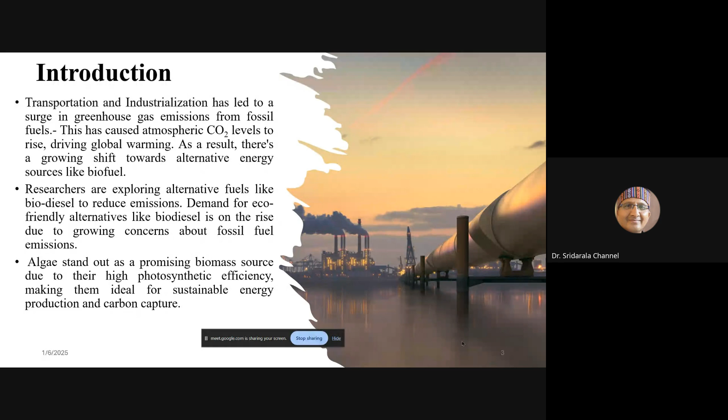When we say biofuels, in the broad category we all know about biodiesel, right? Many of us have long been familiar with the term biodiesel. Can anyone answer what biodiesel is? Sir, biodiesel is manufactured by transesterification of triglycerides with 3 moles of methyl alcohol. Exactly, exactly. Very good.

So what is the raw material used for biodiesel production? Sir, we can simply say its origin is triglycerides, vegetable oil or animal fat. Animal fats. Very good. Exactly.

Over the last 2 decades, research has focused on alternative fuels like biodiesel, which are derivatives of vegetable oils, exclusively non-edible seed vegetable oils, and the demand for alternative fuels like biodiesel is on the rise due to growing concerns about fossil fuel emissions.

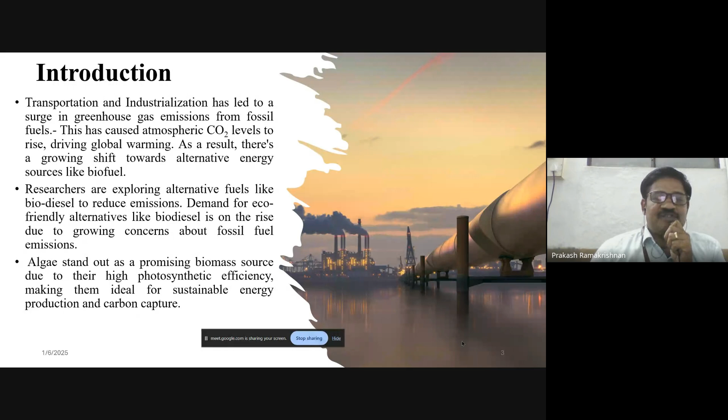And here, for the HTL process, we introduce one more biomass as a feedstock, which we call algae biomass. It comes under the third generation biomass category and is a promising biomass source due to its high photosynthetic efficiency, making it ideal for sustainable energy production and carbon capture.

So the first stage is to select an appropriate biomass suitable for this HTL process, and then it needs to be characterized, with ultimate analysis, proximate analysis, and other chemical characterization, to identify its suitability for the hydrothermal liquefaction process.

Then we move on to the HTL process and the process variables to be discussed. Then the oil yield, which we call biocrude, is obtained from this HTL process. The biocrude oil needs to be characterized to know its physicochemical properties, and then we move on to engine applications.

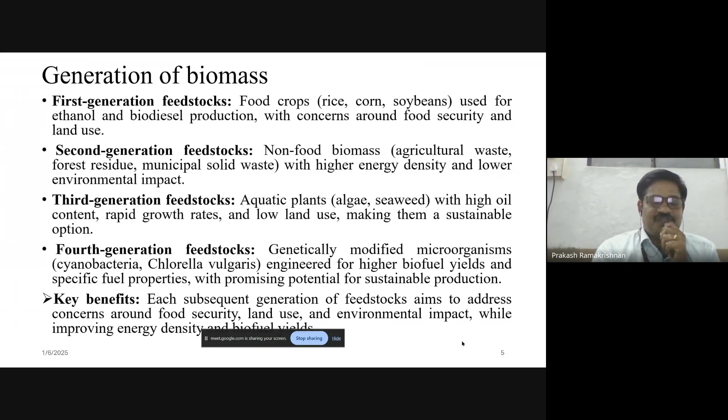And to start with the biomass characterization, first we should know what is the elemental composition of biomass. Each biomass contains carbon, hydrogen, oxygen, nitrogen, and sulfur, with the maximum amount of composition from carbon. Approximately 50% of carbon may be there in any biomass on a dry weight basis. Higher carbon content levels in the biomass mean that it has a higher heating value, and it has a very good thermal energy potential, making it suitable for renewable energy applications.

And hydrogen content is essential for biomass for its growth. It's a major content, and sugarcane, corn, switchgrass, or algae are hydrogen-rich biomass resources. That's going to enhance the hydrothermal liquefaction process reaction rates and the heating value of the biocrude oil obtained from this HTL process. And the oxygen content: oxygen helps in cleaner combustion, but it affects the heating value of the biocrude. If excessive oxygen is there, the calorific value of the fuel will reduce.

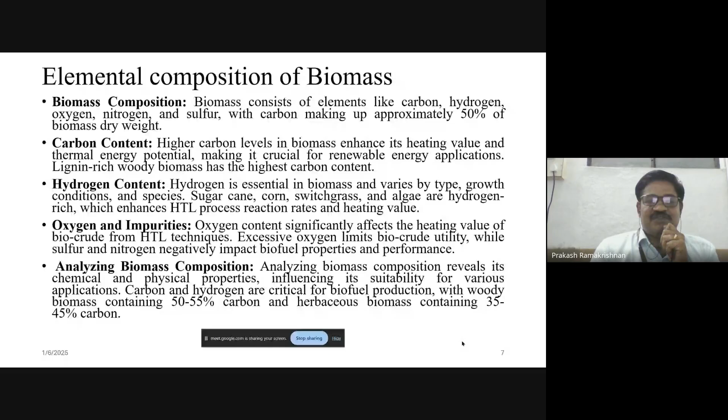Carbon and hydrogen are most essential for biofuel production, where woody biomass contains around 50% carbon, and herbaceous plant biomass contains 35 to 45% carbon content. Moving on to the proximate analysis of biomass. The first step is the elemental analysis, where we analyze the carbon, nitrogen, sulfur, oxygen, and the next step is the proximate analysis to find out the moisture content present in the biomass, ash content, volatile matter, and how much fixed carbon is present. This is again an important step in biomass characterization.

So the ash content should be as low as possible. We should select the biomass where the ash content left from the process is as low as possible. Then the moisture content affects the bio-oil conversion efficiency and its quality, so what researchers generally do is dry the biomass completely before processing. Drying the biomass before processing will enhance the efficiency.

But for this particular HTL process, there is no constraint on moisture, because the HTL process can accommodate wet biomass also. Normally, other thermochemical conversion processes like pyrolysis or gasification require dry biomass, with no moisture content, to get the maximum yield. Pyrolysis is a thermochemical conversion process where you keep the substance in a reactor and supply heat externally, and in the absence of air or oxygen, the biomass inside the reactor undergoes thermal decomposition, yielding a gaseous product. By condensing it, you can get a bio-oil yield.

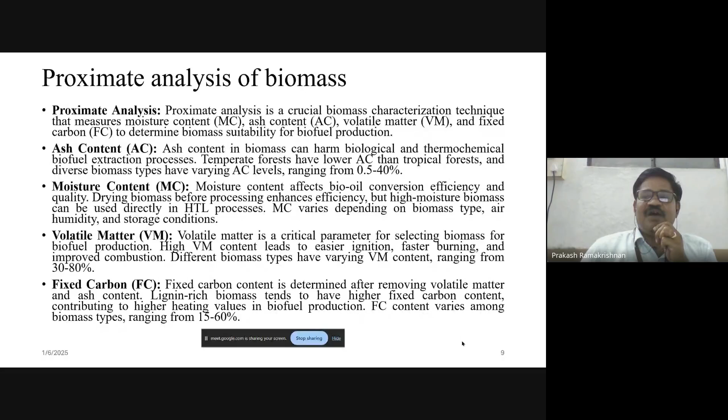The fixed carbon content for biomass may vary from 15 to 60 percentage. Another important parameter for any biomass is that it should have a higher calorific value. So the calorific value, we classify into higher calorific value and lower calorific value. But generally, whatever we directly get from burning biomass is the higher heating value, which represents the total thermal energy released during a complete combustion process.

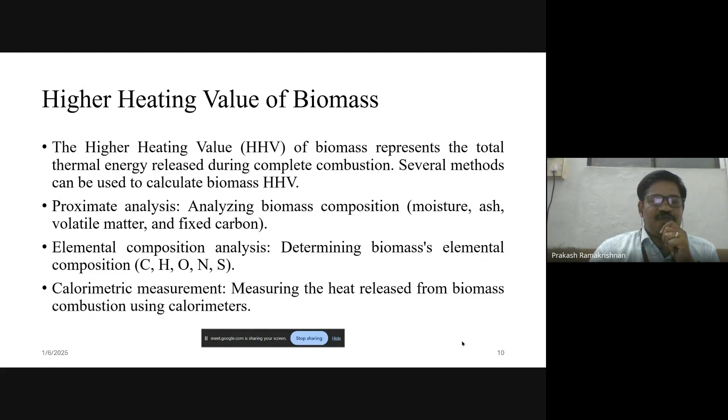There are different methods to calculate this higher heating value: by proximate analysis, analyzing biomass composition from moisture content, volatile matter, and fixed carbon, and even from elemental composition using CHNS analysis. Conventionally, we also use bomb calorimetric measurement, where we directly measure the heat release from biomass combustion using calorimeters. These are the options to measure the higher calorific value of a biomass material.

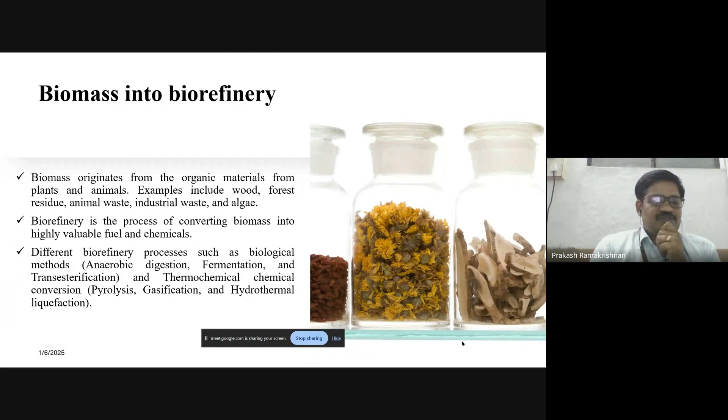Moving on to biomass biorefinery concepts, we don't aim only at liquid fuel. You can aim at producing or converting some value-added products out of biomass conversion. We may have heard about anaerobic digestion, fermentation, and transesterification process - these are all biological conversion methods. In thermochemical conversion methods, we can elaborate with pyrolysis, gasification, and hydrothermal liquefaction process.

So moving on to thermochemical conversion of biomass. The first category is pyrolysis, where the reaction temperature is limited between 300 to 800 degrees Celsius, carried out at atmospheric pressure level. The biomass is kept in a pyrolysis reactor and heated at 300 to 800 degrees based on thermogravimetric analysis. It then leaves the pyrolysis vapor. By condensing the pyrolysis vapor, you can collect pyrolytic oil, which we call bio oil, and also get biochar out of this pyrolysis process.

The second method is gasification. You may have heard about fluidized bed gasification, fixed bed gasification, and other methods. This is generally held at atmospheric pressure conditions, but the temperature is slightly higher than pyrolysis, between 700 to 1200 degrees Celsius. This yields a gaseous product, not a liquid product. Generally, gasification is meant for producing syngas, which is a hydrogen rich gas obtained from biomass resources.

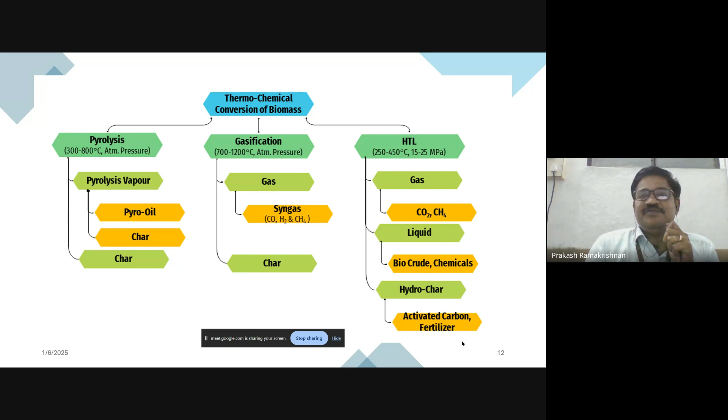The topic of our interest is the hydrothermal liquefaction process, where the reaction temperature is maintained at lower levels compared to pyrolysis and gasification. The HTL process can be done at a temperature of less than 450 degrees Celsius, but not at atmospheric pressure conditions - here we need to apply pressure also. So HTL process has input variables like pressure as well as temperature. Pressure should be between 15 to 25 megapascal, that is 150 to 250 bar pressure applied to the reactor.

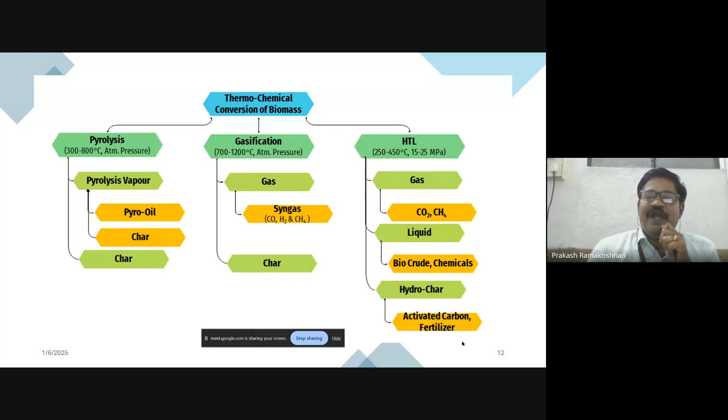This process can yield a gaseous product, which is methane rich with carbon dioxide in remaining composition. If you get a liquid product out of that, you collect it as biocrude and other value added products. This also leaves a char, which we call hydrochar, which can be used for producing activated carbons and can be used as fertilizer. This is the introduction to the HTL process.

Hydrothermal liquefaction process is a thermochemical conversion process that converts wet biomass into a biocrude, which can be upgraded to produce renewable fuels, chemicals, and other valuable products. In this HTL process, the wet biomass is fed into a reactor, which is subject to high temperatures between 200 to 350 degrees Celsius and pressures up to 250 bar.

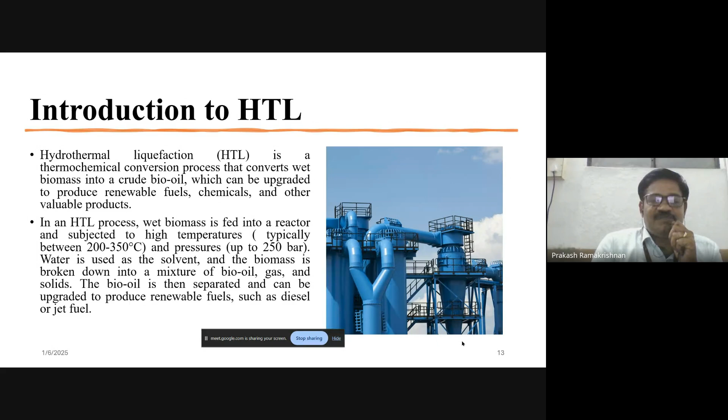As there is no limitation on moisture content, you can add water as a solvent to the biomass and prepare a biomass slurry by making a mixture of biomass and water, and this slurry has to be fed inside the reactor. I'll show the reaction conditions. In this method, the complex biomass molecules are broken into simpler compounds such as hydrocarbons, oxygenated compounds, and water.

There are a variety of feedstocks that can be used in the HTL process. We can focus exclusively on algae, municipal solid waste, and lignocellulosic biomass. It has a significant advantage in that there is no need for the feedstock drying process, which reduces the energy input spent for the entire process.

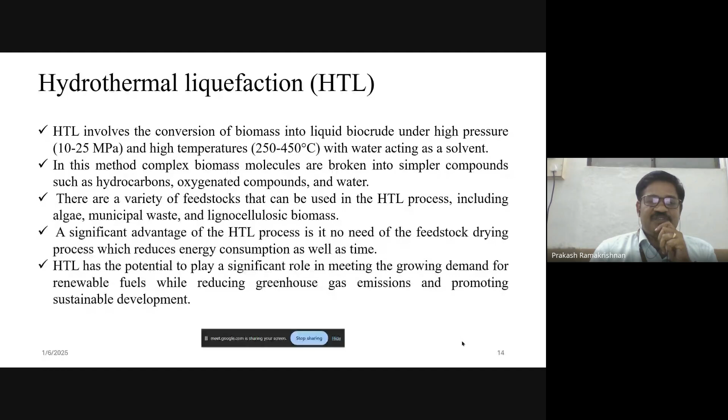So it has a potential to play a significant role in meeting the growing demand for renewable fuels, and also it's going to reduce greenhouse gas emissions, which is going to promote sustainable development.

So this is the reaction mechanism of this HTL process. There are three major reactions that are going to take place during this HTL process.

The first one is depolymerization, where the hydrolysis of biomass with water is going to happen, or you can replace the water with other solvents like ethanol, methanol, acetone. The first step in the HTL process mechanism is depolymerization, where you break down the molecules of biomass by mixing a solvent, either water or ethanol, methanol, acetone, or any other solvent.

The second step is degradation, where these hydrolyzed monomers undergo dehydration, where the water content has to be removed, and you can also remove ammonia-type compounds through deamination and decarboxylation, removing the excess carbon content.

Finally, the recombination process will happen, where these reactive monomers combine together to produce a biocrude. So first stage is hydrolysis of biomass with solvent, then degradation of the biomass materials, then recombination, where the reactive monomers combine and produce the biocrude as a yield.

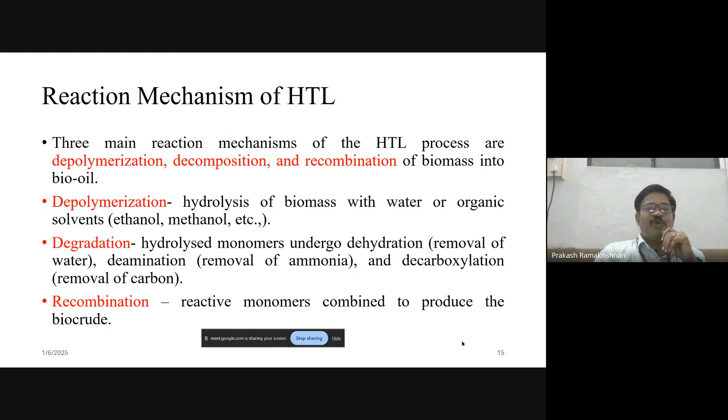This is the schematic diagram of the entire HTL process. Starting from the biomass, biomass and solvent are added together in the form of a slurry, which is fed into the HTL reactor. Directly supplying temperature and pressure may yield gaseous products containing carbon dioxide and methane.

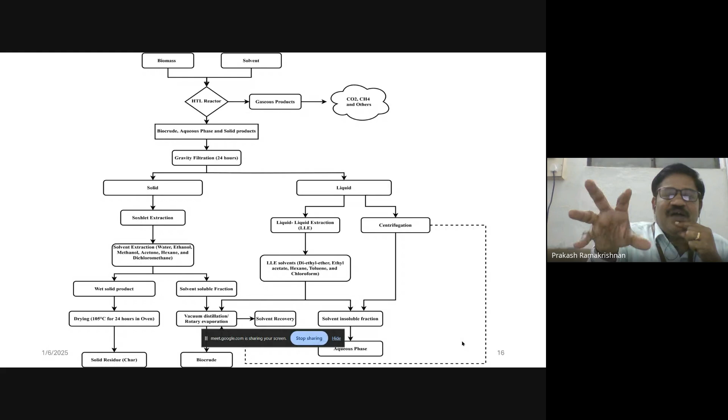Or if you aim at producing liquid fuels, you go with the biocrude, which contains an aqueous phase and other solid products. There's an important challenge in the HTL process: whatever yield you get is called biocrude, and this will be a mixture of aqueous phase and solid phase.

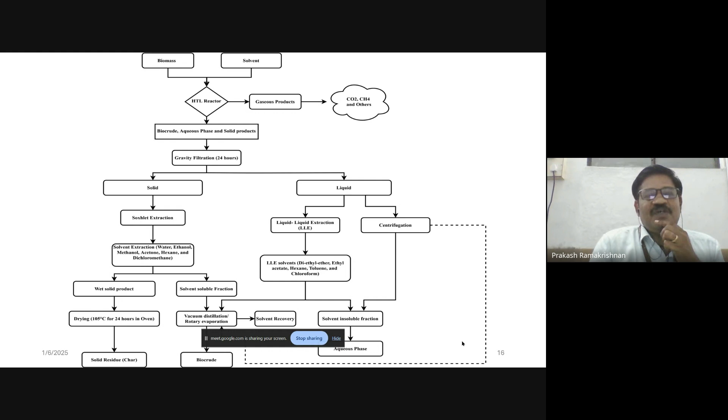So you need to undergo a separation process. Generally we go with gravity filtration, where we keep the aqueous phase in a conical flask and leave it for 24 hours, and the solid particles accumulate at the bottom due to the density factor and can be removed.

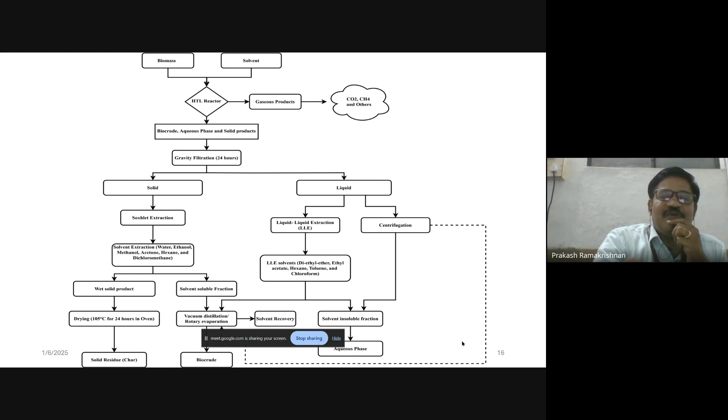If you want, you can further treat the solid particles collected at the bottom of the conical flask with a Soxhlet extraction process by adding some solvent, and you can separate the wet solid product and soluble fractions from that.

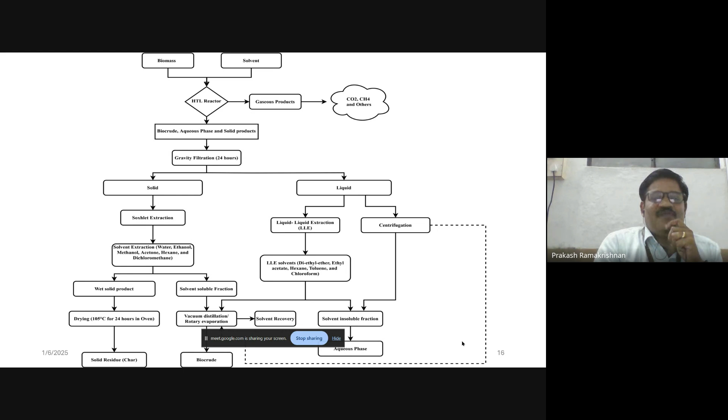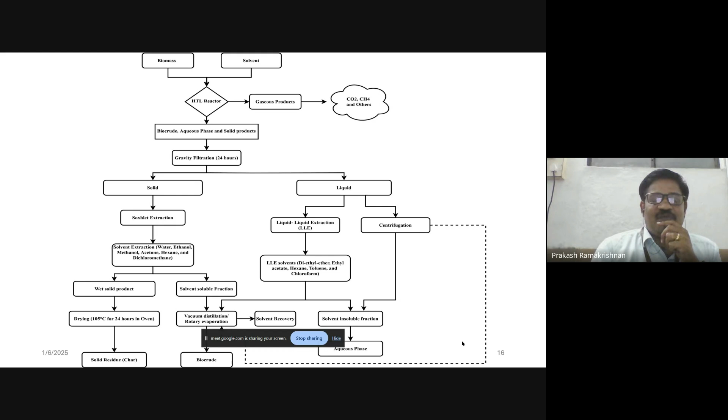From there you can also produce biocrude, and the other part, the solid residue left over at the end, can be considered as char, which can be used as a fertilizer, or it can be further treated to produce activated carbons.

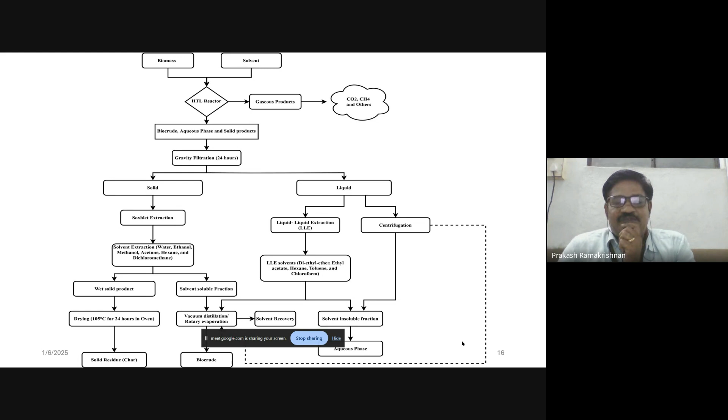Then from the liquid part, the aqueous phase collected has to be subjected to liquid extraction. You need to add a solvent like diethyl ether, ethyl acetate, hexane, or toluene, and process it through vacuum distillation or rotary evaporation. From that you can remove the solvent separately and collect the biocrude.

There is another method called centrifugation, which also separates the solid particles as well as the biocrude fractions.

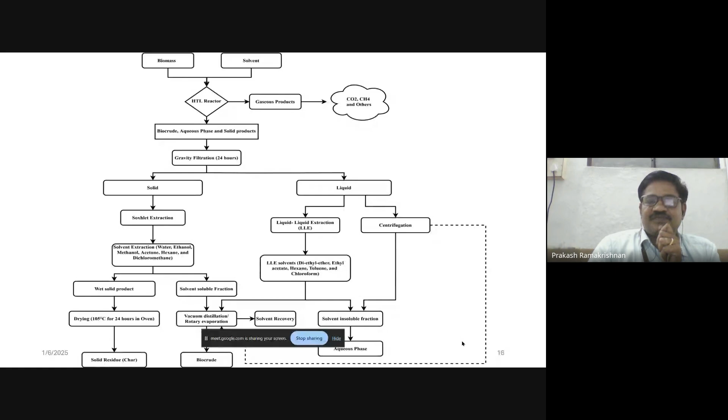This is the process flow diagram of what generally the HTL process undergoes. This is how the reactor looks like. It's a sample one; I will show the actual reactors in my following slides.

The HTL reactor is like a pyrolysis reactor. It's again a stainless steel one with a lid at the top to seal the environment, and it is heated by electrical means from the external side. There is an option to measure the pressure and temperature.

You should connect thermocouples to measure the temperature and pressure. There is a stirring mechanism in the reactor, a motor at the top, to give stirring action to enhance the HTL process. This deals with the solvent tank.

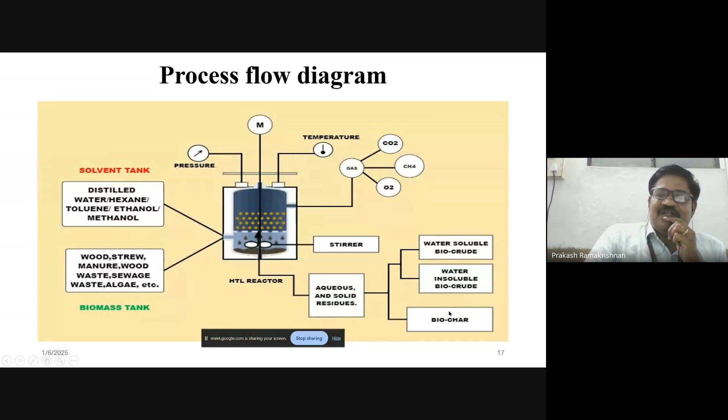This is where you need to supply the biomass and solvent together. We make a slurry, and it has to be filled inside the reactor. This HTL reaction yields aqueous and solid residues, from which you can separate solid particles like biochar, water-soluble biocrude, and water-insoluble biocrude.

And the HTL processing methods. You can have different methods of HTL process. Direct HTL is a simple process. Directly you can take any wet biomass, you don't need to dry it, so it will reduce the cost, the capital cost of the HTL process. But it requires post processing. If you go with direct HTL process, whatever yield you get after the reaction may undergo several steps of separation process for upgradation.

And if you go with the catalytic HTL process, where you use catalysts to improve the reaction rates, that is going to increase the biocrude yield and reduce the oxygen content present in the biocrude substance. And there is another method called co-solvent HTL to enhance the conversion efficiency and reduce char formation.

That we can go with co-solvent HTL process. And the other method is hydrogen-assisted HTL. Normally for pyrolysis or HTL process, to start the reaction, initially we purge nitrogen as an inert gas, which goes inside the reactor and replaces the entire air out of the reactor. You have to ensure there is perfect vacuum or inert environment inside. By passing this inert gas, we replace the air outside. Instead of purging nitrogen, you can also purge hydrogen, to produce high quality biocrude with lower oxygen content, but you need to supply external hydrogen for that.

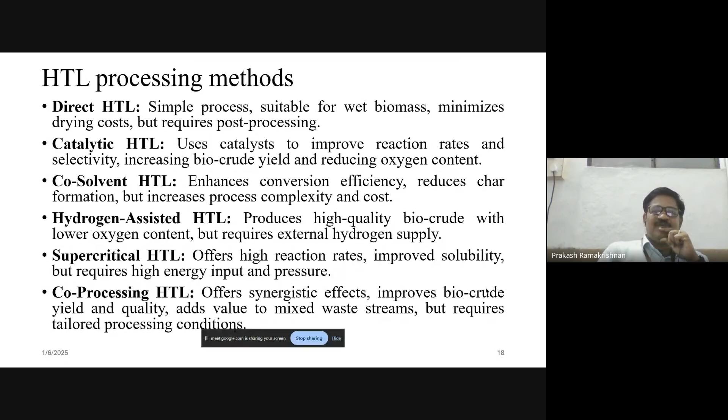And there are some supercritical HTL reactors where the reaction rates are very high and give very soluble biocrude fractions, but it requires higher energy input and pressure conditions. And in recent days, there is a co-HTL process that is booming, where biomass materials are mixed with waste plastics or other recyclable or non-degradable materials together to improve the biocrude yield and the quality of the value-added products.

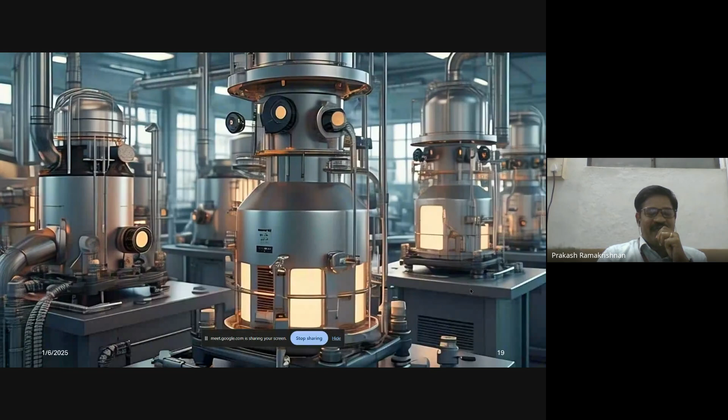So this, anybody have seen this type of structure? How you name this one? How does it look like? Boiler. It looks like a boiler. Any other? Anybody seen these autoclave reactors? Autoclaves. Autoclaves are also a kind of HTL reactors only.

Like you can use autoclaves for HTL process. So moving to HTL reactor types: you will find a batch reactor, which is simple in design and suitable for small scale or laboratory studies, but it has a limitation for scalability.

And again, there are some advanced continuous flow reactors for industrial scale production for large quantity of biocrude production. Generally, industries go with these continuous flow reactors. And there is a plug flow reactor also, which has high conversion efficiency, uniform flow, and is easy to scale. But there is a problem with the plug flow reactor where it may undergo fouling effect.

And again, the advanced versions will have the stirred tank reactor where there will be a stirring mechanism to maintain uniform temperature and pressure distribution inside the reactor, suitable for viscous or heterogeneous feedstock, but it is energy intensive, meaning you need to supply electrical energy to drive the motor for the stirring action inside the reactor.

And the fluidized bed reactors, similar to the gasification fluidized bed or circulating fluidized bed we heard about. This will ensure excellent mixing of biomass substance and enhance heat transfer, suitable for solid or semi-solid feedstocks, but the design is complex and requires heavy maintenance expenditure. And the coil tube reactors are compact and efficient, and reduce residence time variations, but there is a problem of clogging in coil tube reactors when rich solid feedstocks are used. It will encounter clogging problems.

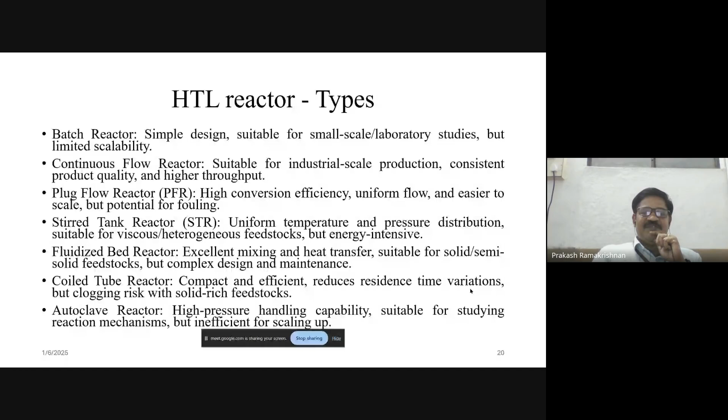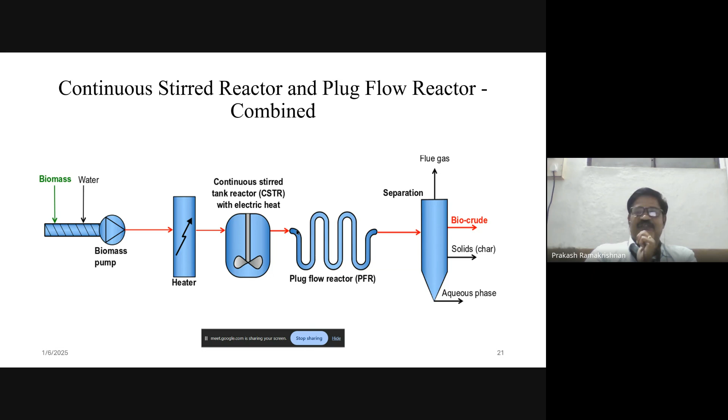So this combined continuous stirred and plug flow reactor has the advantages of both the continuous stirred mechanism as well as the plug flow reactor mechanism. So that is going to yield a large quantity of biocrude, and the separation process is going to happen in all the cases. I'm going to the separation processes, the HTL process separation methods.

The first step is phase separation. So first step, separate the biocrude, aqueous phase, and solids based on the density. That's the gravity separation I told. So it is going to separate the biocrude, aqueous phase, and solids based on its density and its solubility difference. Second step, it's filtration to remove the biochar from the liquid effluent using filters or membranes.

And the third step that you can go with is centrifugation, that's going to be efficient for separating solid and liquid phases using centrifugal force. Or otherwise, we can go with solvent extraction, where biocrude can be refined by adding some solvent, and that is going to remove the impurities, and also you can get some other value added compounds from that solvent extraction method. Distillation process, vacuum distillation process, is commonly used.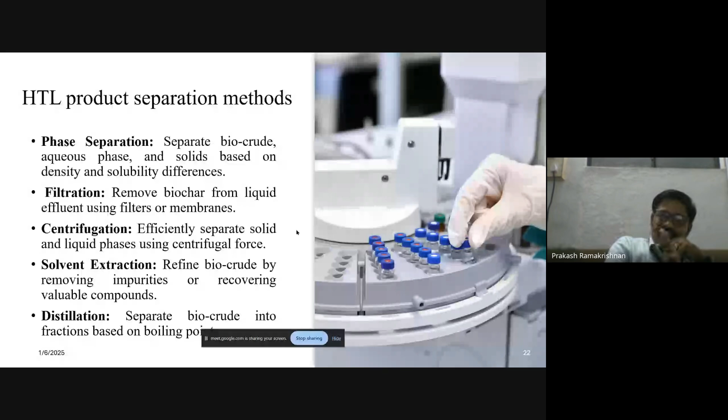You can separate the lower molecular fractions and heavy molecular fractions using the fractional distillation process. Here, what we call it as heavy oil fractions. And apart from this, byproducts are there from the HTL process. So it is going to leave biochar, aqueous phase, and also biogas, which have some value applications, and can be refined into higher value added products.

So biocrude is generally viscous in nature. It's again an energy dense oil. It can be used as a transportation fuel or heating fuel in furnaces, or it can be used as a chemical feedstock, and it's going to be a carbon neutral fuel.

And biochar, it's again a carbon rich solid residue, which can be used for soil amendment, can be used as adsorbent material, say activated carbons, which are promising materials used for the carbon dioxide capturing process. For CO2 capturing, these activated carbons are used as adsorbent materials, or it can be used as a solid fuel source.

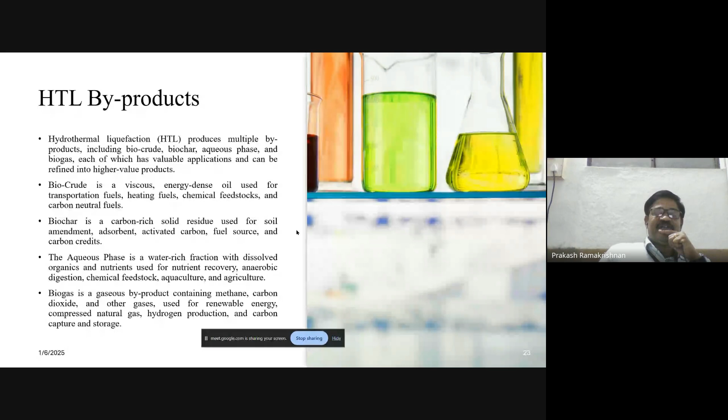The aqueous phase, which is a water rich fraction dissolved with organics and nutrients, can be used for nutrient recovery, and it can be further treated in an anaerobic digestion process to produce biogas, or it can be used to produce chemical feedstocks, for aquaculture and agriculture.

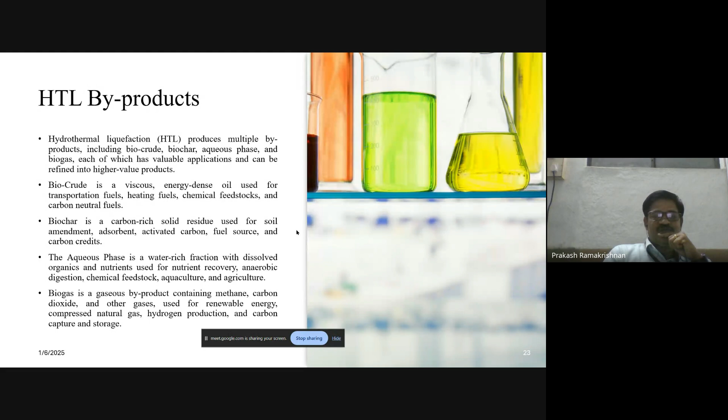And the final part, the biogas, is a gaseous byproduct which contains a large amount of methane and carbon dioxide and other gases, which can be used as a renewable energy source like compressed natural gas, or as an energy resource for separating hydrogen from biomass resources, and it can be used for carbon capture and storage purposes. And the biocrude upgradation techniques: it can be upgraded by hydroprocessing.

Hydroprocessing is generally the process of removing oxygen, sulfur, and nitrogen from the biocrude using hydrogenation or hydro-deoxygenation. So hydrogenation is enriching the biocrude with hydrogen, which will replace the oxygen content in the biocrude. And hydro-deoxygenation is again removal of oxygen from the biocrude product. And you can further upgrade the biocrude through catalytic cracking by breaking down the heavy biocrude molecules into lighter hydrocarbons using some catalyst.

Also, you can subject this biocrude to the transesterification or esterification process. It's going to convert the free fatty acids in the biocrude into esters. So the free fatty acids present in the biocrude are converted into esters. That will reduce the acidity and improve the fuel properties.

In the earlier stage we discussed the distillation process; again, you can separate the biocrude into lower molecular fractions and heavier molecular fractions based on the boiling points, and they can be used for further processing. Electrochemical upgrading employs electrochemical cells to remove the oxygen and nitrogen from biocrude through reduction mechanisms, and solvent deoxygenation uses solvents to remove the oxygenated carbons from the biocrude.

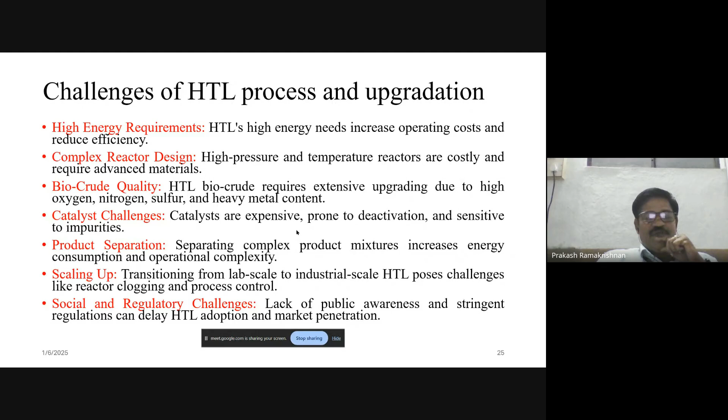Then product separation: separating complex product mixes increases energy consumption and operational complexity, and scaling up is again a challenge. Translating the HTL process from lab scale to industrial scale brings process challenges like reactor clogging and process control. Apart from that, there are some social and regulatory challenges. There is a lack of public awareness, and there are stringent regulations that can delay HTL adoption and market penetration. So far, it is still not commercial; people are doing it only at the research level.

And the future prospects: it can proceed with microwave irradiation. That will increase the biocrude yield from lipid, produce comparable yields from protein and lignin, and decrease the yield from carbohydrate. And there are a lot of opportunities to adopt machine learning techniques to predict the product yield and the quality of the biocrude, rather than using conventional mathematical models.

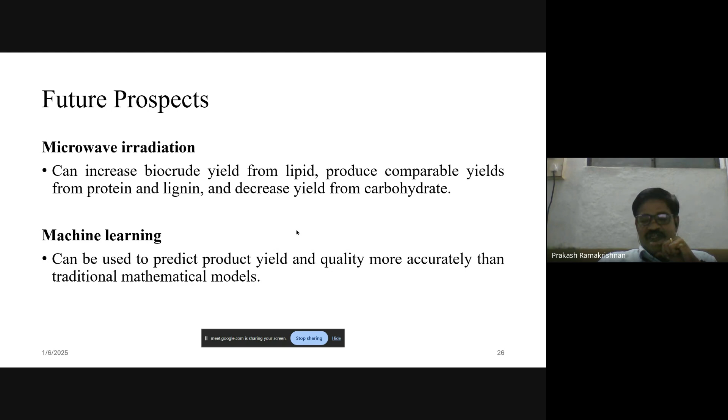Right. So this is about the general one. Now to my experimental facility, which we designed as an outcome of a sponsored research project funded by the Department of Science and Technology. This is a currently ongoing project where we have designed a reactor with SS316 material, withstanding a maximum operating pressure of 250 bar and a temperature of 450 degree. It's a kind of autoclave reactor. It's a fixed bed reactor, not a continuous one.

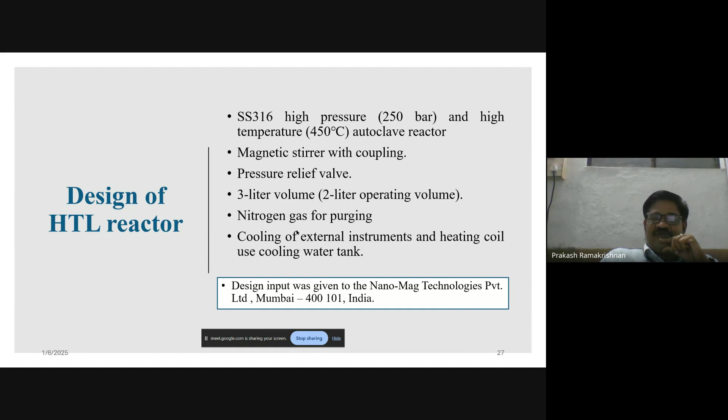It has a magnetic stirrer with coupling, and there is a pressure relief valve to avoid any unwanted incidents during the reaction process. It's 3 liter volume, but you can go ahead with 2 liter volume, not the full volume, for the HTL process. There is an option for nitrogen purging, and we provided external cooling coil arrangements to reduce the temperature of the reactor once the reaction is over. This was designed by a supplier from Mumbai, Nano-Mag Technologies, and this is the design input that we provided to the vendor.

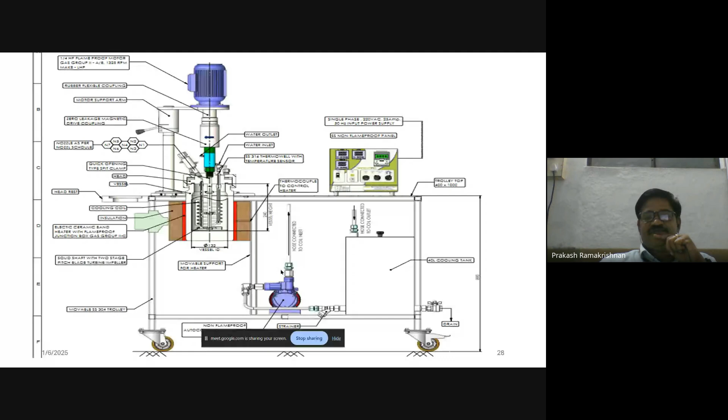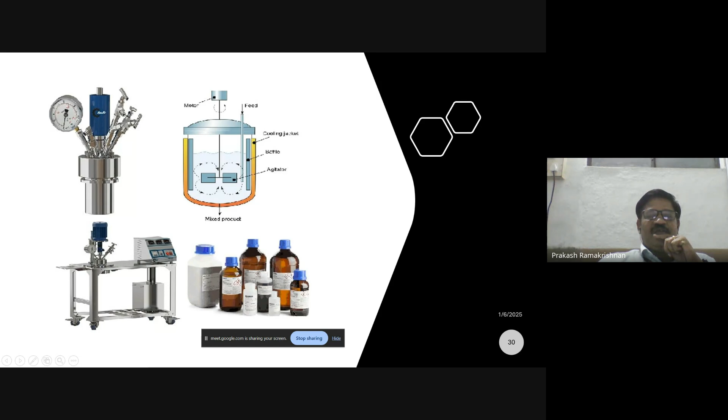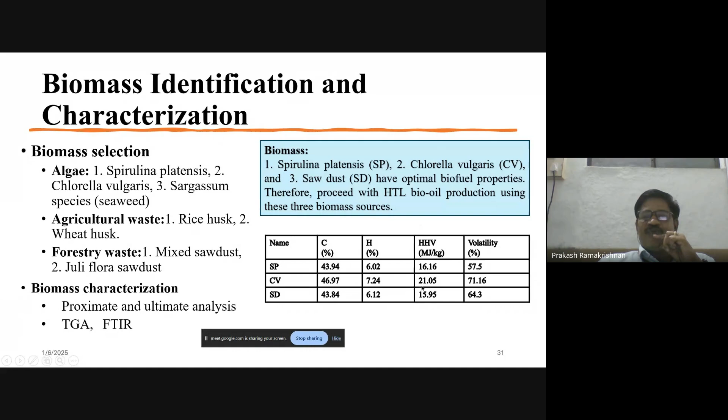For the HTL process, we selected 3 different algae biomass materials: spirulina, chlorella vulgaris, and sargassum, what we call seaweed. We also tried rice husk, wheat husk, and forest waste like sawdust obtained from juliflora wood. We did complete characterization, proximate analysis, ultimate analysis, and FTIR analysis, to find the elemental composition of each biomass, like carbon and nitrogen, the heating value, and the volatile substances present. These are the results from the ultimate analysis.

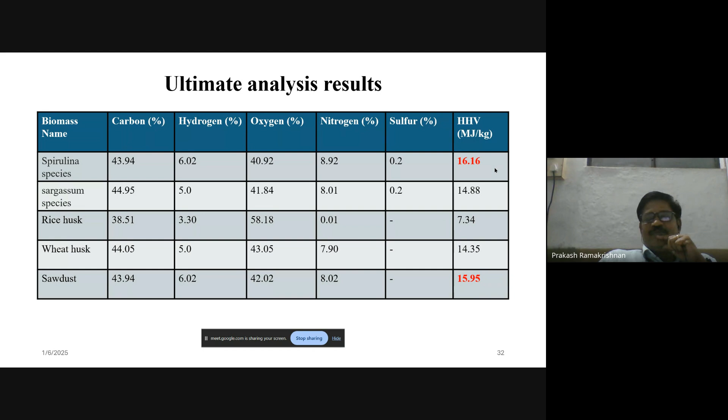The 5 different species we selected: spirulina species, sargassum species, rice husk, wheat husk, and sawdust, with their carbon, hydrogen, oxygen, nitrogen, and sulfur content, and calorific value. Out of these 5 biomass, the first one, the algae biomass of spirulina species, contains the maximum heating value of 16.16 megajoules per kg, and that we have considered for further conditions.

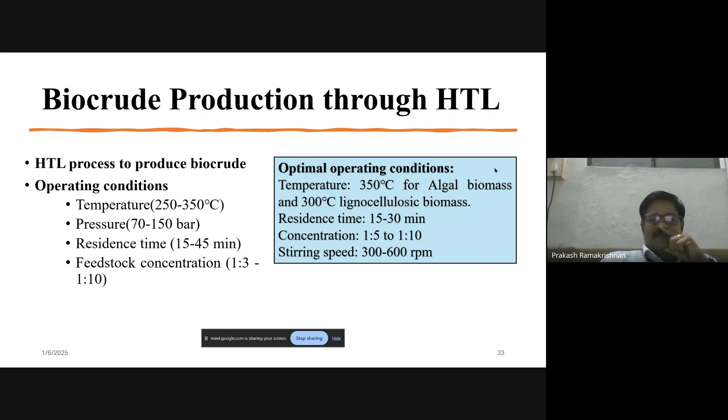So these are our operating conditions. We set the temperature between 250 to 350 degrees, and we vary the temperature at different intervals, 250 to 275, like that. For different temperatures we tried, and pressure we started from 70 bar to 150 bar, and we provided the residence time of 15 to 45 minutes based on the feedstock concentration. And the feedstock concentration we have chosen is 1:3 and 1:10. One is 1 part of biomass and 3 parts of solvent. The stirring speed we maintained at 300, 600 RPM.

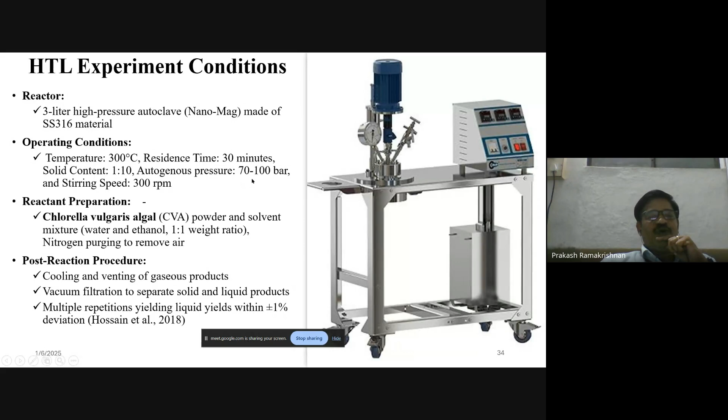And these are the experimental conditions we provide. We maintained temperature at 300 degrees Celsius, a residence time of 30 minutes, and a 1:10 feedstock ratio, and the autogenous pressure will automatically maintain at 70 to 100 bar, and a stirring speed of 300 RPM.

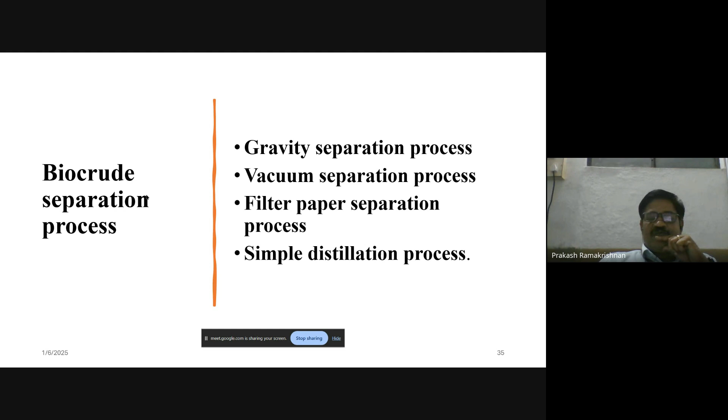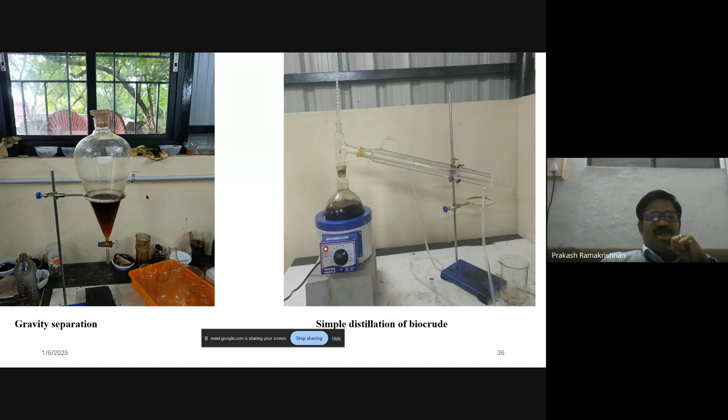Further, after the reaction, we underwent a gravity separation process, vacuum separation process, filter paper separation process, and simple distillation process to separate the biocrude into lower fractions and heavier fractions. And these are some photographs, for gravity separation and simple distillation of this biocrude.

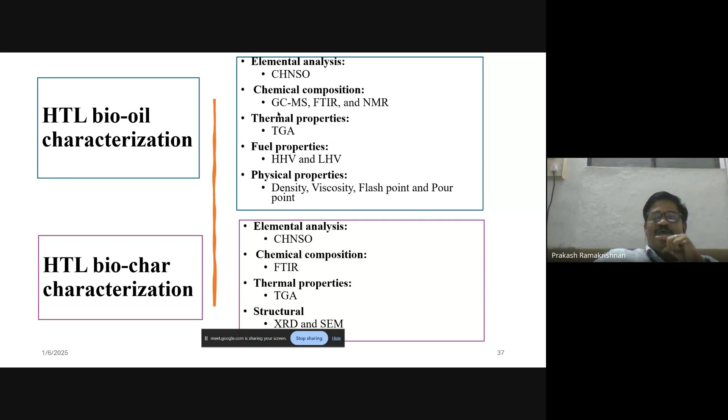And then the bio crude oil we collected from the HTL process was treated with elemental analysis. We find out the carbon, nitrogen, sulfur content. We tested our sample with GCMS analysis to find out the chemical composition, and to find out the functional groups it is subjected to FTIR analysis, and the thermal properties, fuel properties like calorific value, viscosity, density, flash point, and the cold flow properties like cloud point and pour point we also measured.

So these are some images that we collected from our actual experiments. The biochar, the biocrude obtained from this spirulina algae, and the aqueous phase after separation we collected, and this is sawdust, and the biochar we collected from that.

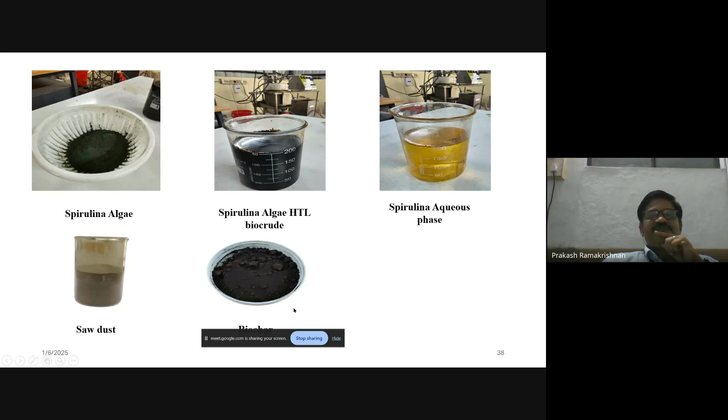And we have the results of yield percentage of different biomass materials at different operating conditions and different operating temperatures, say from 260 degrees, 280 degrees, 300. For every 20 degrees, we conducted the experiment by maintaining the residence time of 15 minutes and 30 minutes. We found the carbon, nitrogen, sulfur, oxygen content, and we checked where we get a higher calorific value. So based on that, we have chosen the bio oil for further engine experiments.

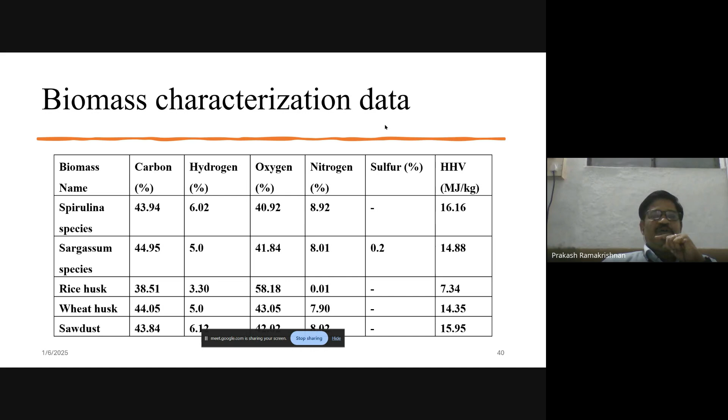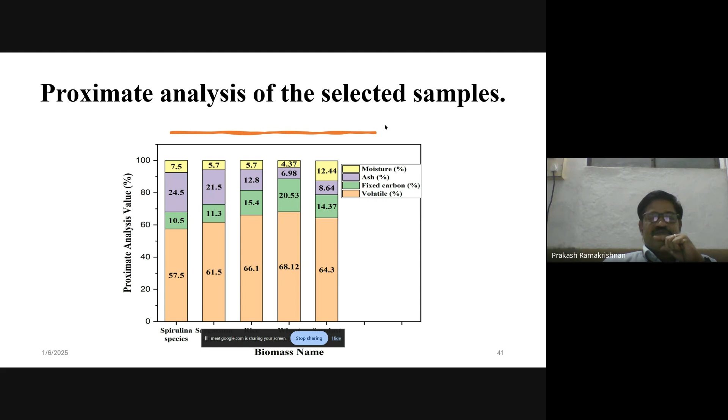So these are again the properties of different biomass materials. This is the biomass sample analysis before the oil, what biomass we used for our investigation. We tested the proximate analysis and ultimate analysis to find out the elemental composition of the biomass material.

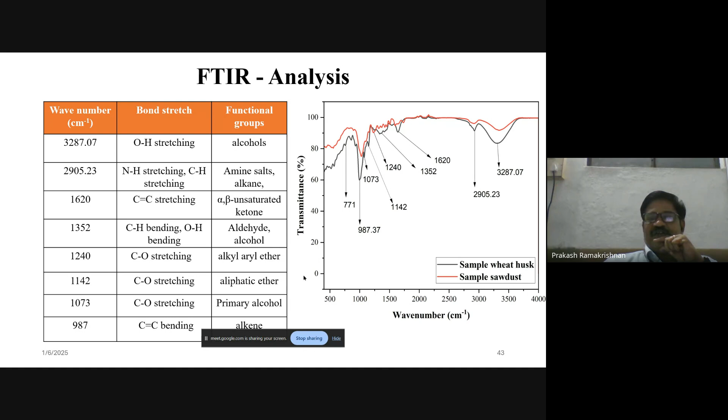And this again is the FTIR analysis of the biomass materials, and you can see the functional groups present in the biocrude substance. You can find that it contains alcohols and ethers, aliphatic ethers, right? And alkenes, all are there in the biocrude that we collected from this wheat and sawdust material. Same as that, we have done testing for algae biomass samples also.

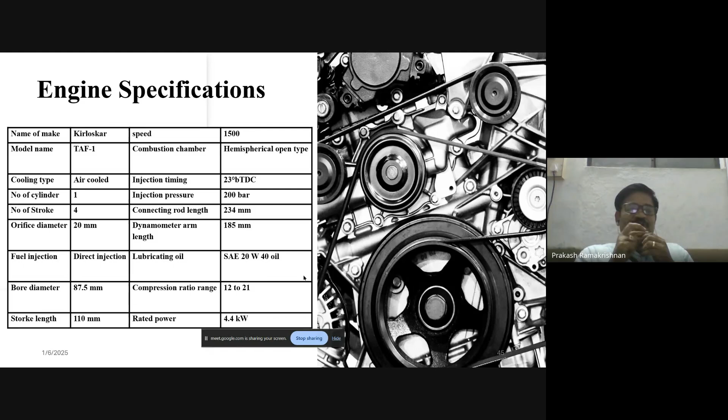And we have tested the biocrude by making blends with diesel, and we tested that in a single cylinder air cooled diesel engine. It's a variable compression ratio engine with a maximum power of 4.4 kilowatt, and this is how the test engine facility available in our campus looks. So we have a variable compression ratio engine with eddy current dynamometer, and we have this exhaust gas analyzer to measure the exhaust emissions, and this diesel smoke meter to measure the smoke opacity.

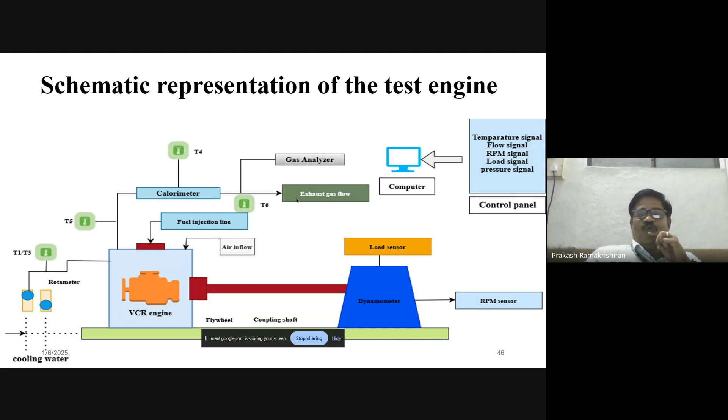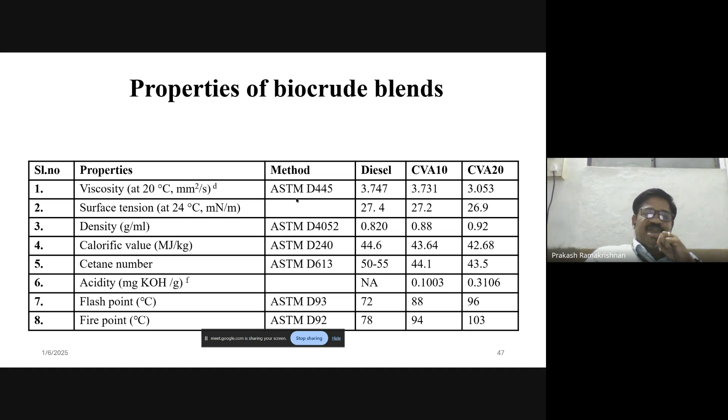So before testing, we need to know the fuel properties. We measure the viscosity, surface tension, density, calorific value, cetane number, like a calculated cetane index, and acidity value, flash point, fire point from a standard test facility. And we measure the performance parameters like brake power, brake thermal efficiency, brake specific fuel consumption, exhaust gas temperature, and the emissions like CO, HC, NOx, and smoke emissions.

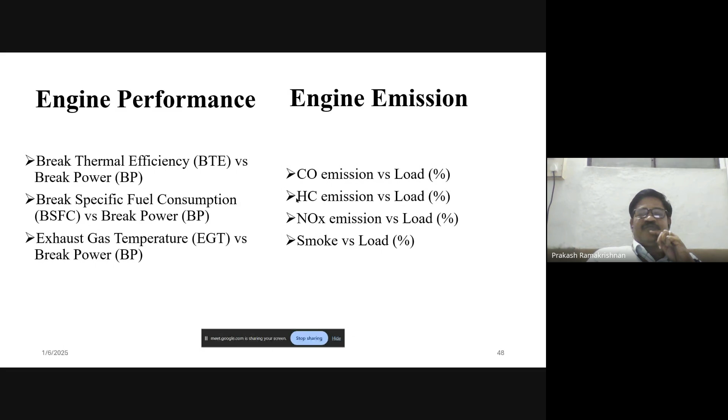And if I'll stop you for a while, if any questions are there from the audience, I'm happy to answer. Or shall I complete my presentation and I'll wait for the questions? Sir, kindly proceed with the presentation, sir. At the end of the session, we will ask the participants. Fine. Thank you, Dr. Abhishek.

And in the engine performance, what we found is that maybe due to these larger droplets, due to the high viscosity nature, it may form larger droplets during atomization, and it may not mix thoroughly with the air, and because of that, it may lead to lower brake thermal efficiency.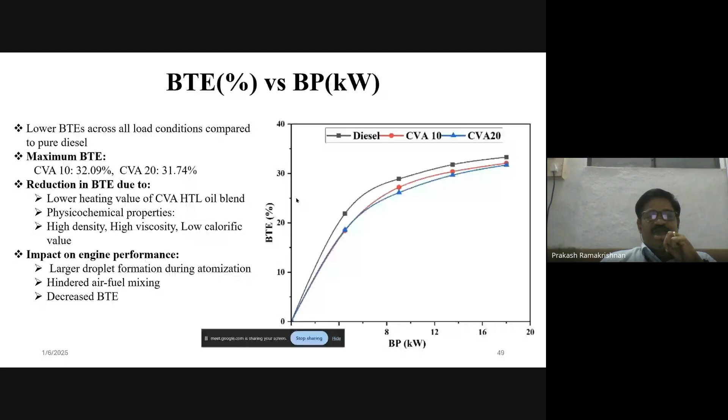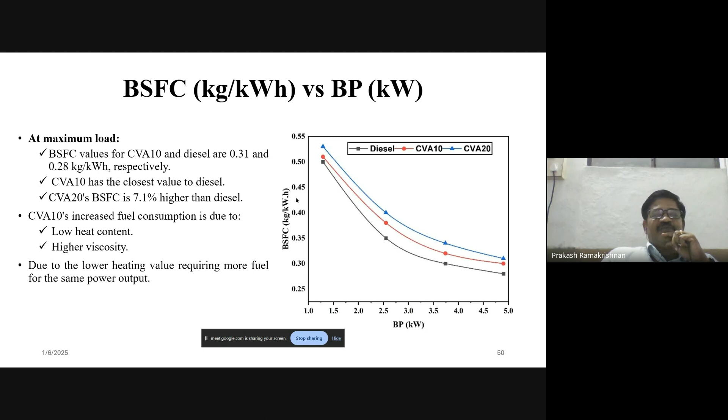And brake specific fuel consumption is generally again a measure of the calorific value. So if the fuel has a higher calorific value, you may come up with a lower brake specific fuel consumption. Since these fuels have lower heat content and higher viscosity, the brake specific fuel consumptions are slightly higher than diesel, but it is close to diesel fuel in the case of the 10% blend.

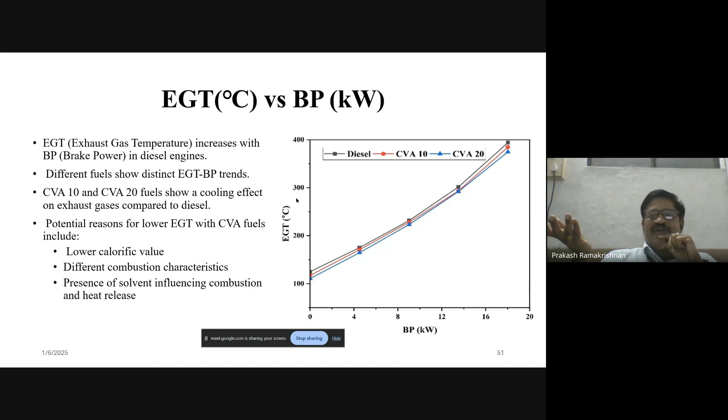And the exhaust gas temperature generally increases with brake power in diesel engines, and for the different fuels, the exhaust gas temperature and BP trends are shown in this image. Normally biomass-based fuels like bio oils or the HTL bio crude oils, whatever way you treat them with the separation process, may have some inbuilt moisture content. So that may have a cooling effect, and because of that, it may come up with a lower exhaust gas temperature compared to diesel fuel.

On the emissions part, we all know that all biomass-based fuels, biodiesel, biocrude or bio oil fuels, have oxygen content, whereas diesel fuel doesn't have oxygen in its molecules. So this will lead to lower carbon monoxide emissions. Generally CO emissions are caused by oxygen scarcity. If there is proper oxygen availability, you won't get much carbon monoxide. If there is inadequate mixture preparation and incomplete combustion, that may lead to higher CO emissions. But here, CO emissions are decreased in the blends due to the oxygen content present in the bio oil.

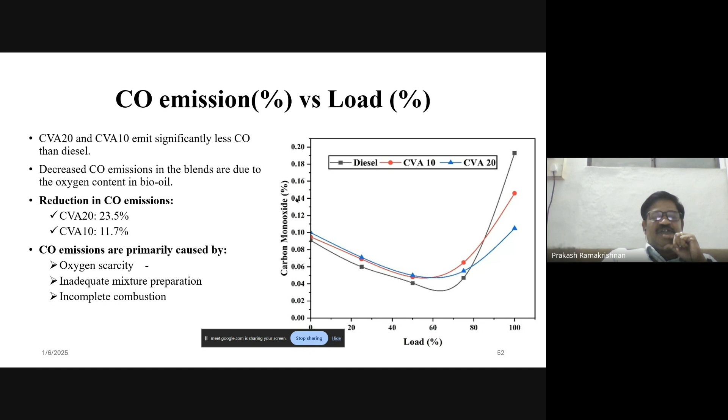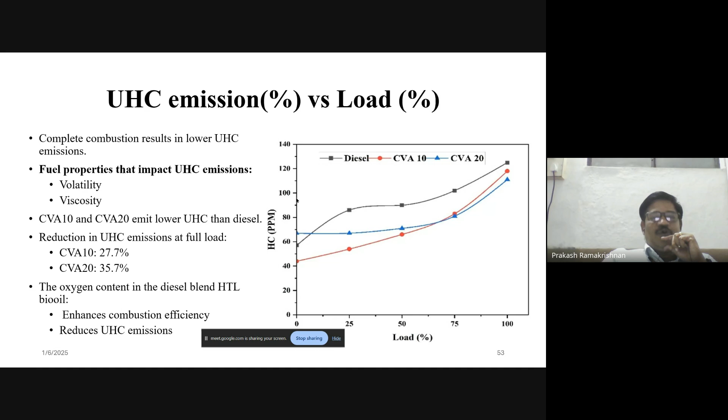And the same way for HC emissions: as a result of more complete combustion and enhanced combustion efficiency, it also emits lower unburned hydrocarbon emissions. And NOx emissions are again a function of combustion temperature and the oxygen environment. NOx gets formed when there is a high combustion temperature and oxygen is available in the combustion chamber. So NOx emissions will increase when the combustion temperature rises above 1200 degrees Celsius.

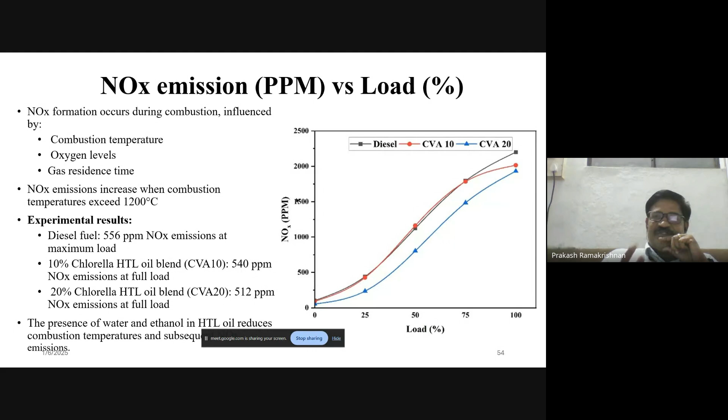And here, when you compare the NOx emissions of diesel fuel with the algae bio oil blends, they exhibit lower NOx emissions due to the presence of water and ethanol. Ethanol is used as a solvent. So whatever separation process we use, by default there will be some alcoholic substance and water combined with the biocrude. That is going to have a quenching effect on the combustion chamber temperature, which reduces the NOx emissions.

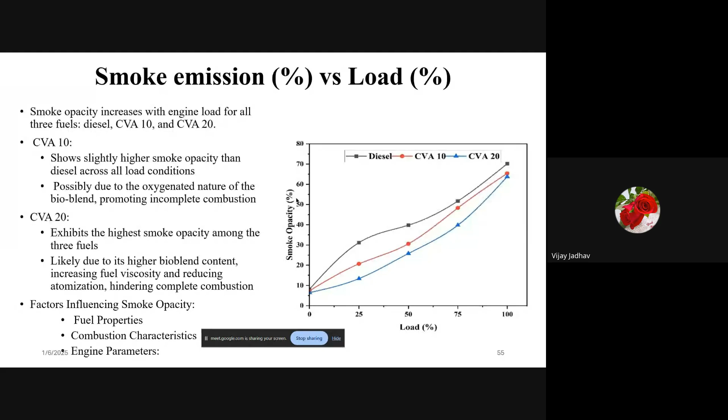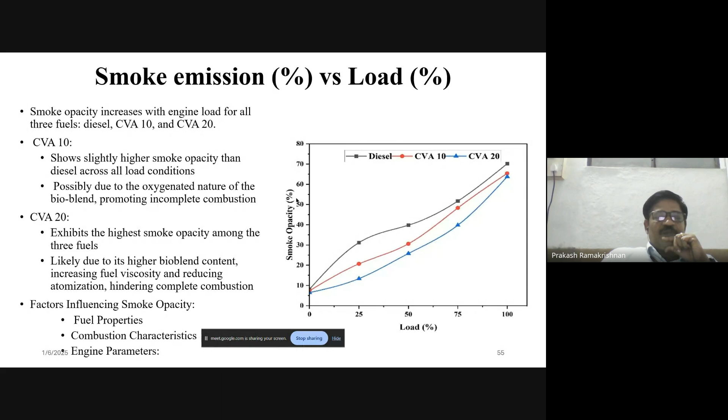And smoke emissions show slightly higher smoke opacity. The slightly higher smoke opacity was exhibited with the bio oil blends due to the increased viscosity and reduced atomization, which constrains complete combustion.

Right. So coming to the conclusion part, the HTL experiments were successfully conducted under the optimized conditions at a temperature of 300 degrees and a residence time of 30 minutes with a feedstock ratio of 1:10 at a stirring speed of 300 rpm. We maintained the pressure at 70 to 100 bar. This yielded a promising bio oil yield. We tried different temperature and residence time conditions, and this was the optimum condition we obtained from the experiments.

In terms of performance parameters, these blends of biocrude demonstrated reduced engine performance with lower brake thermal efficiency and higher brake specific fuel consumption due to lower heating value and higher viscosity. Emission-wise, they exhibit lower HC, CO and NOx, as well as smoke emissions.